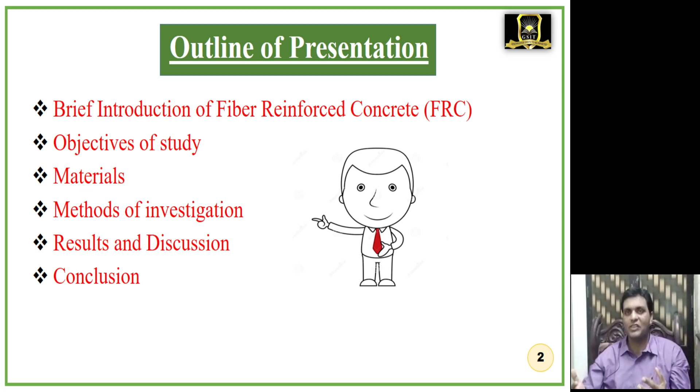So let us start. This is the outline of my presentation. The first one is a brief introduction of FRC, that is fiber reinforced concrete. Next is the objectives of my study. Next is materials, what materials are used in this study. Next is methods of investigation, what methods and tests are conducted in this investigation. Next, result and discussion, a very important one. And finally, conclusion.

Nowadays, there is a growing awareness of the advantages of fiber reinforcement technique of construction all over the world. In recent times, there is growing interest in the use of various types of fibers in structural applications due to their lightweight, low cost and sustainability. The effects of fiber on the behavior of plastic and hardened concrete varies depending on the concrete materials, mix proportion, fiber type, length, and quantity of fibers added into the concrete. So these are the factors that have to be considered.

As we all know, concrete is weak in tension and strong in compression. Even though reinforcement is provided in the tension zone, micro cracks are developed in tension and compression zones. Generally, concrete made from Portland cement is relatively strong in compression but weak in tension and tends to be brittle. The weakness in tension can be overcome by the use of conventional steel bar reinforcement and, to some extent, by mixing a sufficient volume of certain fibers, which helps improve its toughness. Generally, plain concrete gives very low tensile strength, limited ductility, and little resistance to cracking.

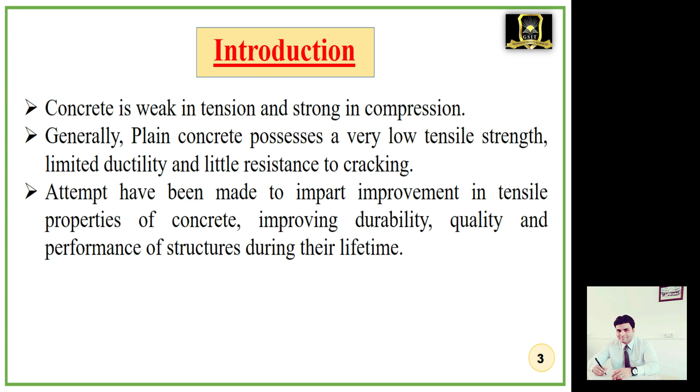So attempts have to be made to improve the tensile properties of concrete, and also to improve the durability, the quality, and the performance of structures during their entire lifetime.

The next one is properties of constituent materials. You can see that flow chart. If you want to prepare fiber reinforced concrete, generally two types of materials are required. One is matrix, second one is fibers. What is matrix? We know that concrete is a composite material. So if you want to prepare concrete, different types of aggregates are required. Matrix is further categorized into cement, aggregate, and admixture.

The first one is cement. All types of cement can be conveniently used in fiber reinforced concrete. Second one is aggregates. The aggregates which are suitable for conventional concrete are also suitable for FRC.

The aggregates are further divided into two types, as we generally know. One is fine aggregate and the second one is coarse aggregate. Fine aggregate is needed for both fiber reinforced concrete (FRC) as well as fiber reinforced mortar preparation. Coarse aggregate, the coarse aggregate which is suitable for normal concrete, is also suitable for FRC concrete.

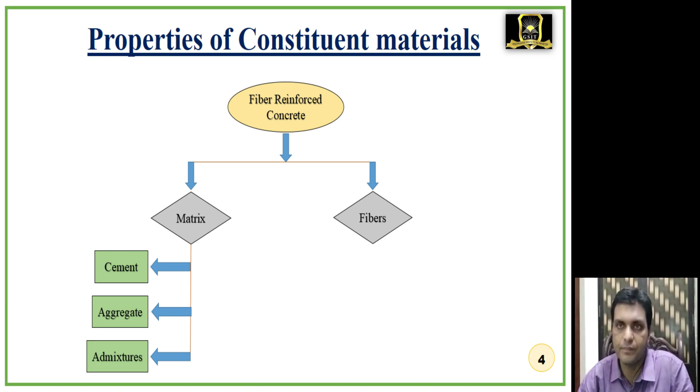Next question: why fiber? It improves properties like ductility, flexural strength, toughness, impact resistance and fatigue strength. There is a little improvement in compressive strength. The amount of improvement depends upon the fiber type, size, strength configuration, and the amount of fibers used in concrete.

Fibers are usually used in concrete to control cracking due to plastic shrinkage and drying shrinkage, that is to eliminate small micro cracks. It also reduces the permeability of concrete and due to that reduces bleeding of water. Bleeding of water is a form of segregation where water comes from the concrete surface due to the lower specific gravity among all the ingredients of concrete. It causes the formation of porous, weak and non-durable concrete.

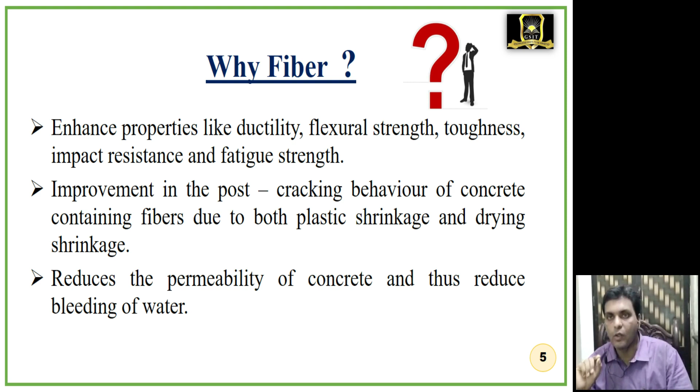Next, history. The concept of using fibers as reinforcement is not new. Fibers have been used as reinforcement since ancient times. In the early age, straw and mortar were used for producing mud bricks, and horsehair was used for reinforcement.

In the early 1900s, asbestos fibers were used in concrete. Later, the use of asbestos in concrete reinforcement was discouraged due to detection of health risks. Active research is still in progress on this important technology.

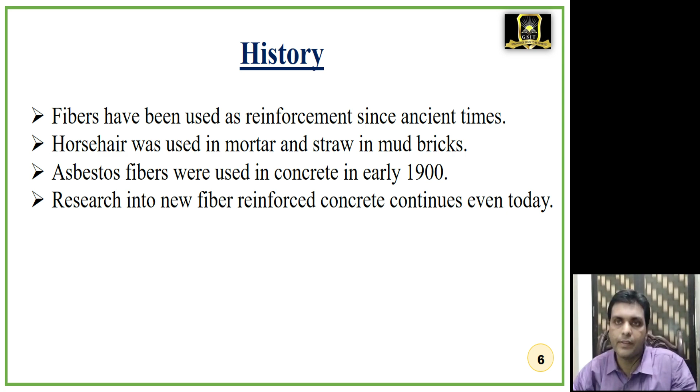Next, FRC, fiber reinforced concrete. Concrete containing hydraulic cement, fine or coarse aggregate, and discontinuous discrete fibers is known as fiber reinforced concrete. FRC is concrete containing fibrous materials which increases its structural integrity. It contains short discrete fibers that are uniformly distributed and randomly orientated.

It enhances flexural and tensile strength of the concrete. It is a composite obtained by adding a single type or blend of fibers to conventional concrete. There are different types of fibers used in industries: steel fibers, glass fibers, synthetic fibers, and natural fibers. Each of these fibers gives varying properties to the concrete.

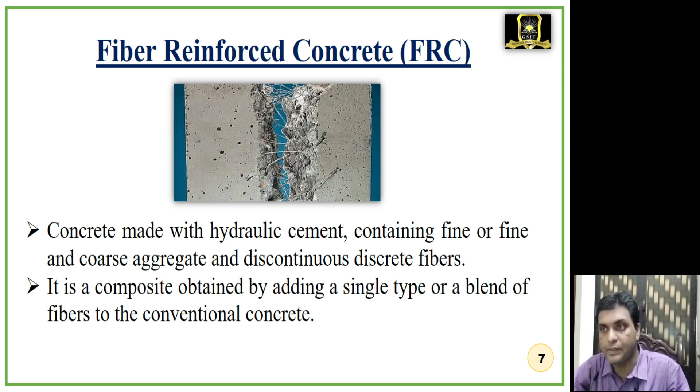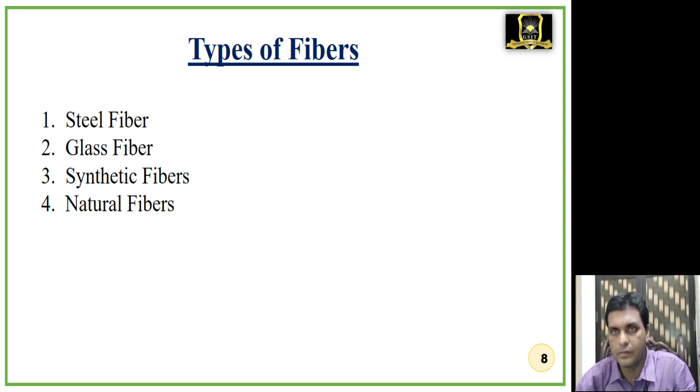Next, types of fibers. Fibers are basically classified as four types: one, steel fiber; two, glass fiber; three, synthetic fibers; and fourth, natural fibers.

Such type of concrete is used for airfield pavements, bridge decks, thin shells and plates, industrial flooring, canal lining, and construction work. Second one is glass fibers.

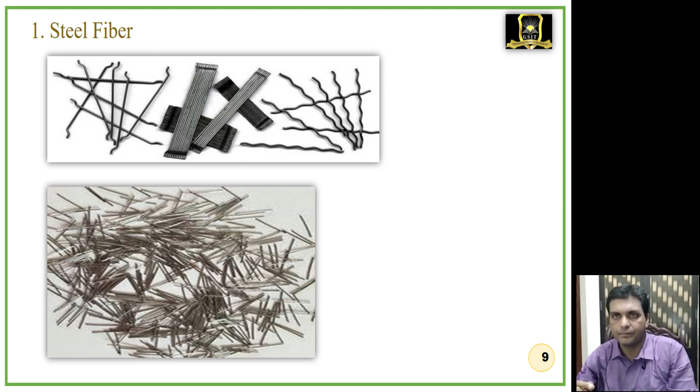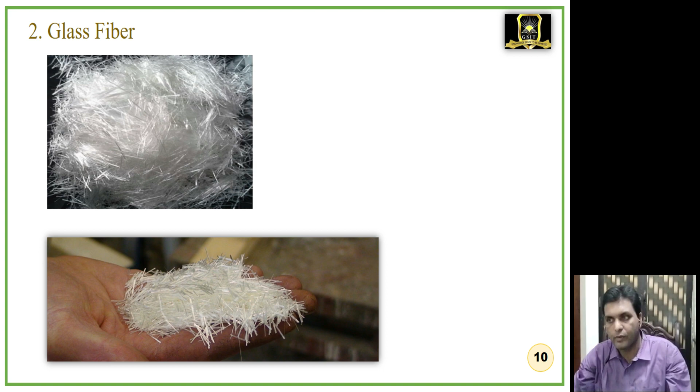Such glass fiber concrete is used for floor formwork, swimming pools, duct and roof, wall paneling, etc.

Third one is synthetic fiber. There are four pictures you can see. First picture, polypropylene fiber. Second one is polyester fiber. Third one is nylon fiber. Fourth one is acrylic fiber. So these are all synthetic fibers.

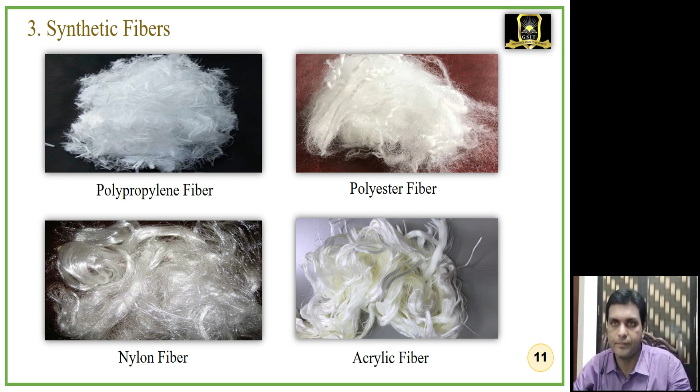Synthetic fibers are an artificial, man-made material that can withstand the long-term alkaline environment of concrete. They are made from synthesized polymers or small molecules obtained from petrochemicals and textile industries. It gives high chemical resistance, high melting point, low modulus of elasticity, and can be used in cladding panels and shotcrete. Fourth, natural fibers.

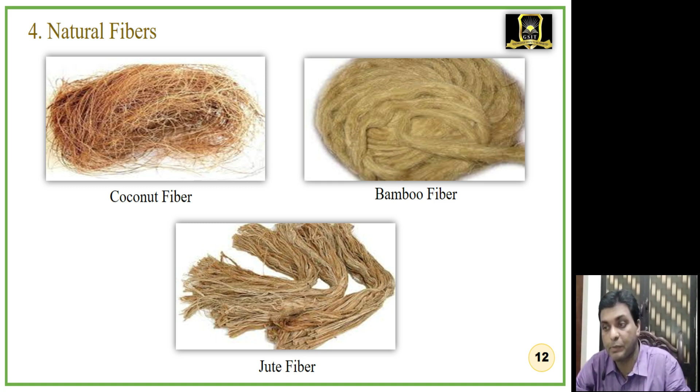You can see in these pictures, these are a few examples of natural fibers: coconut fibers, bamboo fibers, jute fibers. They are obtained at low cost and low level of energy using local manpower and technology. Natural fibers are cheaply available and suitable as an alternative to metallic and synthetic fibers used as building materials. They give low modulus of elasticity and high impact strength. Natural fibers are used in low cost concrete structures, especially in tropical earthquake regions.

Next, the various factors affecting the properties of FRC are: relative fiber matrix stiffness, volume of fibers, aspect ratio of the fibers, orientation of fibers, workability and compaction of concrete, size of coarse aggregate, and mixing. The first one is relative fiber matrix stiffness.

Low modulus fibers such as nylon and polypropylene do not give strength improvement and help in absorption of large energy, therefore increasing toughness and resistance to impact. High modulus fibers such as steel, glass and carbon give impact strength and stiffness to the composite.

Second factor is volume of fibers, which mainly depends upon the quantity of fibers used. Increase in volume of fibers generally increases approximately linearly the tensile strength and toughness of concrete. Use of high percentage of fibers is likely to cause segregation and harshness problems in concrete as well as mortar.

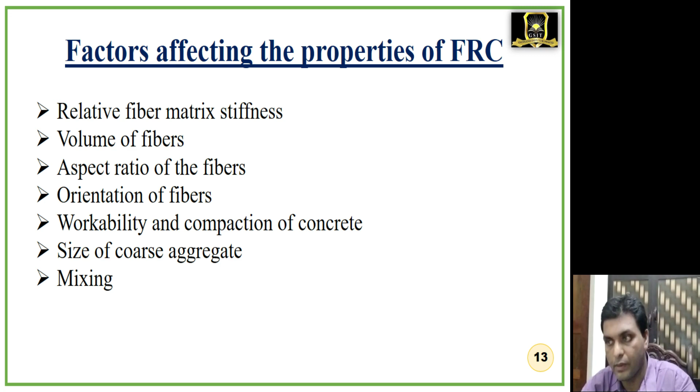Last factor is mixing. Fiber should be mixed in concrete thoroughly to avoid balling of fibers and segregation. Mixing of fibers becomes more difficult when aspect ratio is higher and the volume of fiber is also more.

Next, advantages of FRC. Some advantages of fiber reinforced concrete are: it performs well under heavy service load, meaning the joint edges of FRC members do not swell and chip away easily under heavy service load.

FRC gives more resistance to impact. Depending upon the additional amount of fiber, it gives higher flexural strength. Fibers are made into sheets or irregular shapes. It controls plastic shrinkage cracking and drying shrinkage cracking, and also improves the post-cracking behavior of concrete.

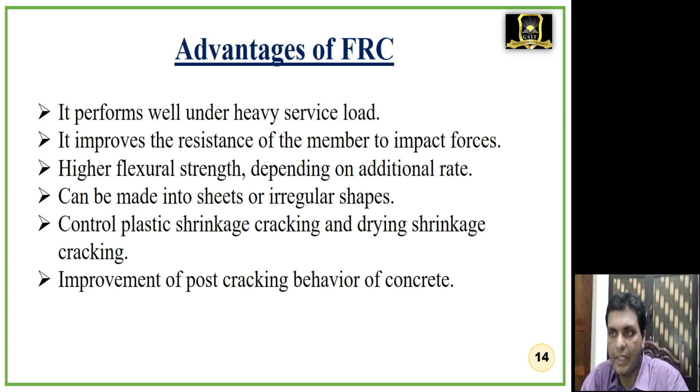Next, disadvantages of FRC. It has a few disadvantages, like reducing the workability of concrete, and high cost of materials in terms of steel fibers. Generally steel fibers are costlier at present, so FRC becomes very expensive compared to RCC in terms of material alone.

The balling effect of fibers makes FRC very undesirable. The main drawback of FRC is its fabrication process.

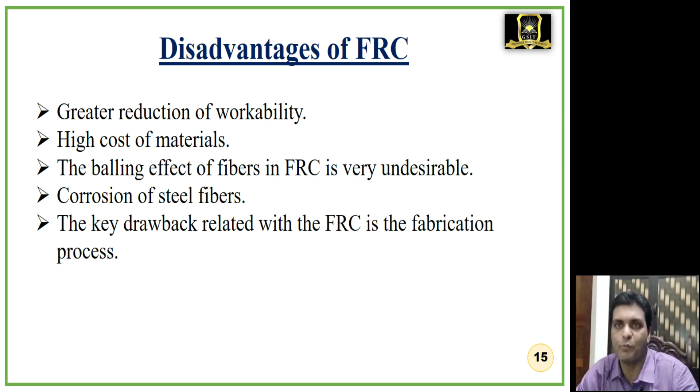Next, applications of FRC. Nowadays many construction projects are using FRC. There are several applications. One is runway, taxiway and airfield pavement. You can see a beautiful runway constructed using FRC concrete. Generally, 150 mm thick crimped FRC slab is used for the asphalt paved aircraft parking areas.

Recently, the Chicago and St. Louis Lambert airports were constructed using a combination of steel fibers and polymesh fibers.

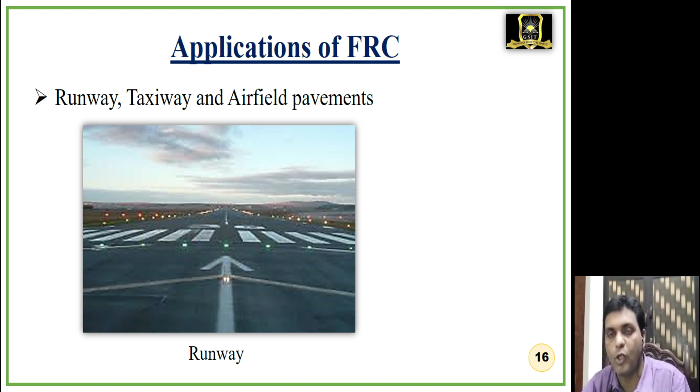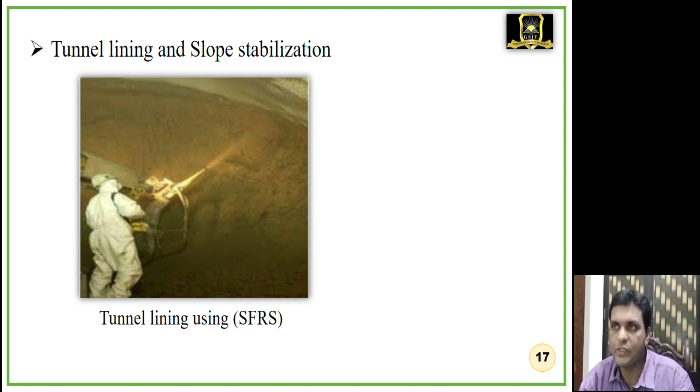Second application is tunnel lining and slope stabilization. You can see in the picture a person doing tunnel lining using SFRS, which is steel fiber reinforced shotcrete. Generally it is used for tunnel lining, especially in underground openings and slope stabilization, eliminating the requirement of mesh reinforcement and scaffolding.

Next is thin shell pipes and manholes. You can see pipes and wall panels in the picture. Generally, fibrous concrete permits the use of thinner flat and curved structural elements.

Steel fiber shotcrete is used in construction of hemispherical domes, and GFRC (glass fiber reinforced concrete) is made using a spray-up process, used in construction of wall panels. Additional steel and glass fibers are used in construction of concrete pipes and manholes, improving strength and reducing thickness.

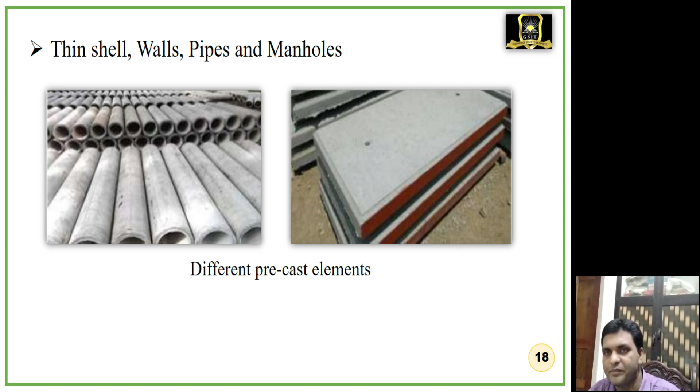The next application is dams and hydraulic structures. You can see a beautiful picture of a marine and hydraulic structure.

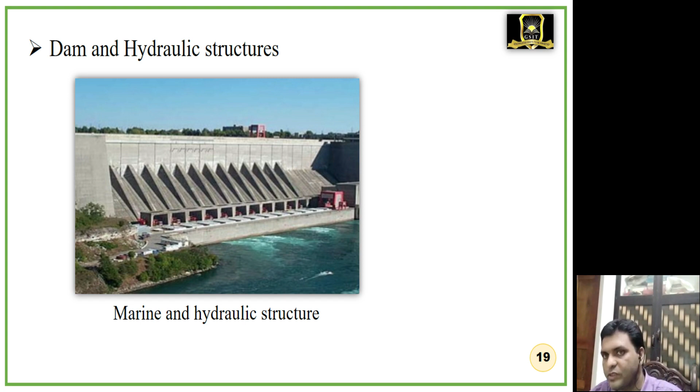Generally, FRC is used for construction as well as repair work of hydraulic structures like dams, wall platforms, lock structures, stormwater structures, and ditches. It provides resistance to cavitation, that is erosion caused by the impact of large water forces.

Other applications include lighting poles, water and oil tanks, concrete repairs, and fabrication of precast products like boats, beams, staircases, etc.

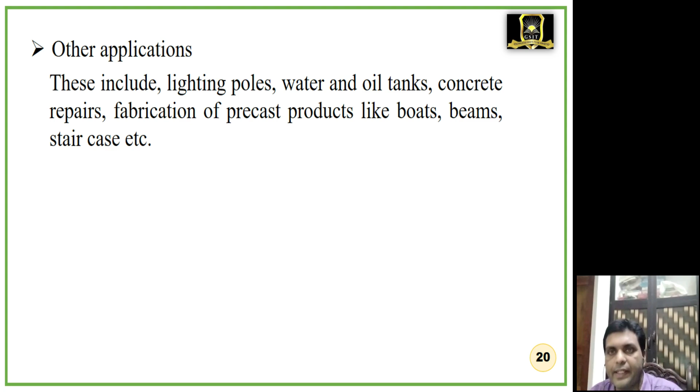Next, some examples in India where FRC concrete is used. This is one beautiful example: recently a road was constructed, a road overlay for a project at Mathura in Uttar Pradesh, where more than 400 tons of steel fibers were used.

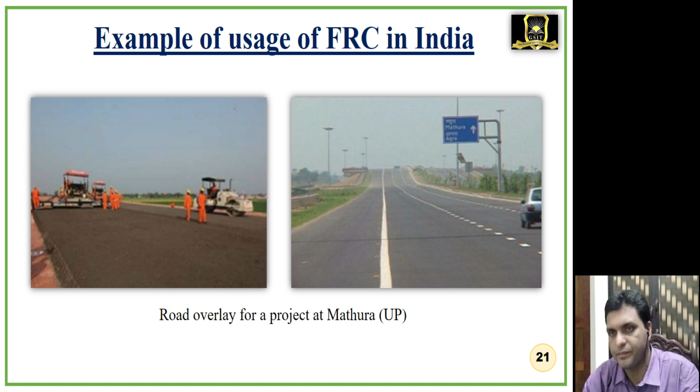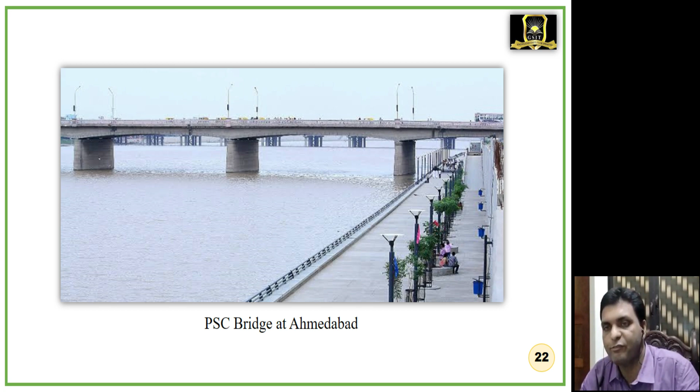You can see in this picture a beautiful bridge constructed at Ahmedabad in Gujarat state. FRC is successfully used at the end and anchorage zones of precast concrete girders for resisting bursting and spalling forces in the bridge.

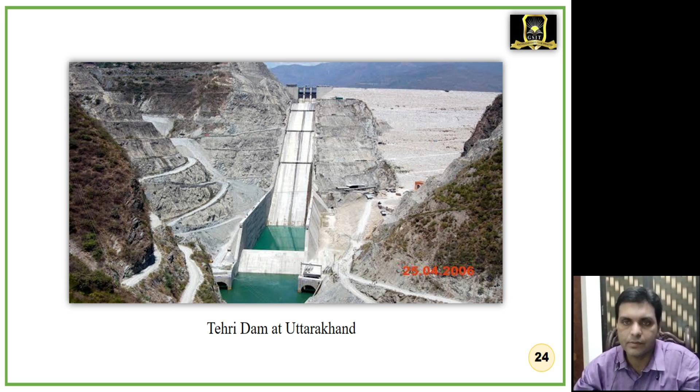Next is Tehri Dam, constructed across the Bhagirathi River in Uttarakhand, a beautiful dam built using FRC concrete. The length of the dam is 575 meters and height is about 260 meters. This dam is used for multiple purposes like irrigation, municipal water supply, and hydroelectric power generation.

Next is the Mumbai to Pune Expressway, as you can see in that picture. It has a 4-lane wide tunnel at 5 locations with a total length of 6,000 meters, constructed by Maharashtra State Road Development Corporation.

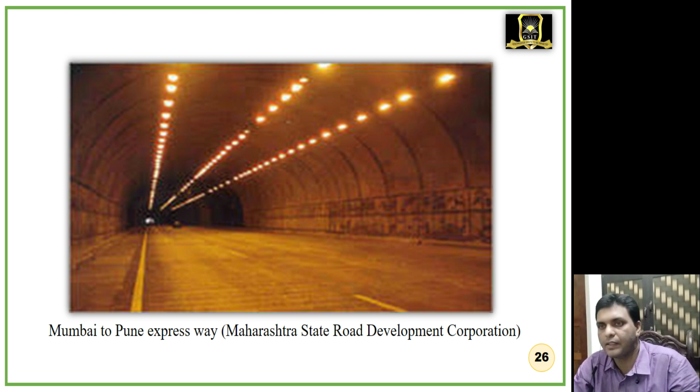This is the experimental investigation we conducted in our GSIT laboratory, on the utilization of polyester fiber for improved properties of concrete.

In this investigation, we determined the split tensile strength and resistance to cracking by determining the flexural strength of plain concrete and polyester fiber reinforced concrete using Recron 3S, a polyester fiber by Reliance. The aim was to increase the tensile strength and flexural strength of concrete, which is generally weak in tension and strong only in compression, and to increase ductility of concrete under tensile stresses.

In this investigation we used OPC 43 grade cement for all experimental work, and all necessary tests on cement and aggregates were conducted. We used various percentages of fiber - 0.2, 0.4, 0.6 by weight of cement - tested for compressive strength, split tensile strength, and flexural strength.

After that, these mixes were compared with the nominal mix with 0% fiber. A comparative analysis was carried out to obtain the percentage increase or decrease in strength due to the addition of fiber for all the above tests.

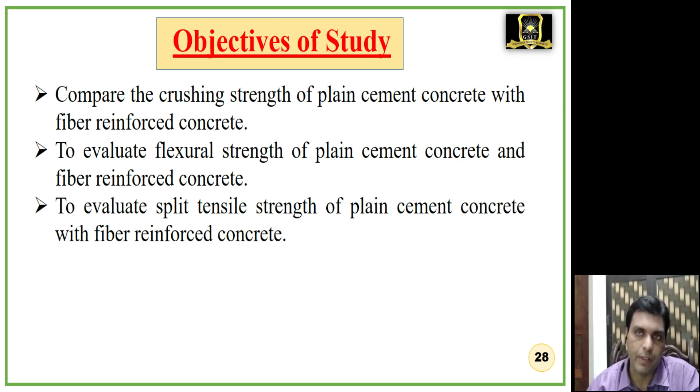Objectives of the study: to compare the crushing strength of plain cement concrete with fiber reinforced concrete; to evaluate flexural strength of plain cement concrete and fiber reinforced concrete; and to evaluate split tensile strength of plain cement concrete with fiber reinforced concrete.

The next topic is materials. First is cement. In our experiment, we used 43 grade ordinary Portland cement, JK brand, conforming to IS 8112:1989, and we tested the cement in our lab.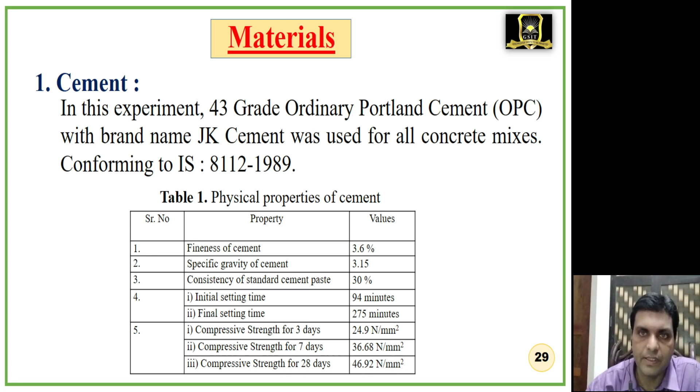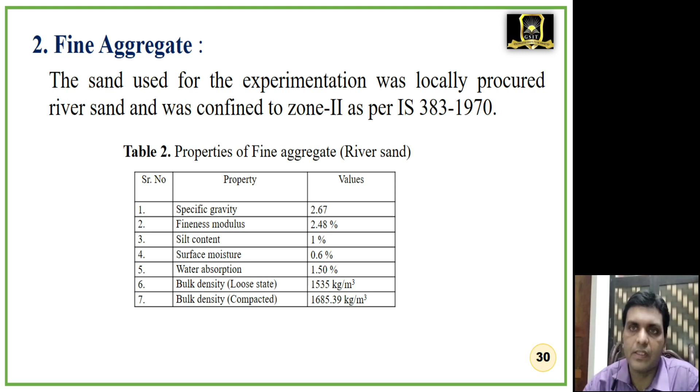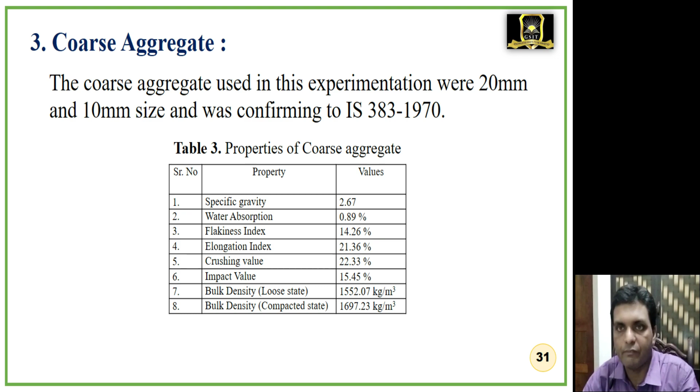Third is coarse aggregate. The coarse aggregates used in this experimentation, 20 mm and 10 mm size, conform to IS 383:1970. Table 3 shows the properties of coarse aggregate. Various tests were conducted for coarse aggregate in our lab, and we found these test results.

The next one is the fourth material, polyester fiber.

We used Recron 3s fiber for this study, which is a 12 mm long triangular monofilament polyester fiber, manufactured by Reliance Technology Center, Mumbai.

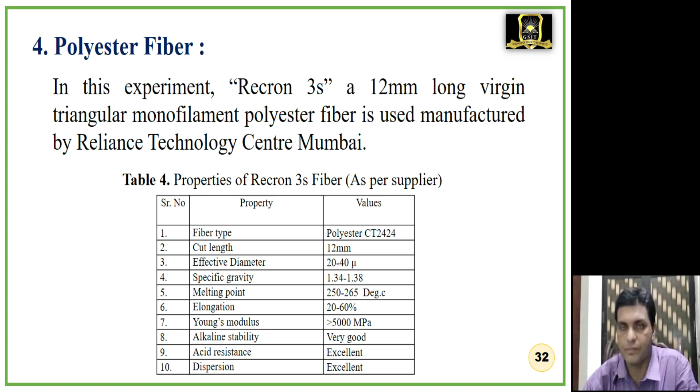Next is water. The water used for this study is clean, free from oil, salts, and acids, generally potable water available in the laboratory.

This water is used to satisfy the requirement as per IS 456-2000.

Mix proportion: M20 grade of concrete with mix proportion 1:1.5:3 and water cement ratio 0.45 was used in this experiment.

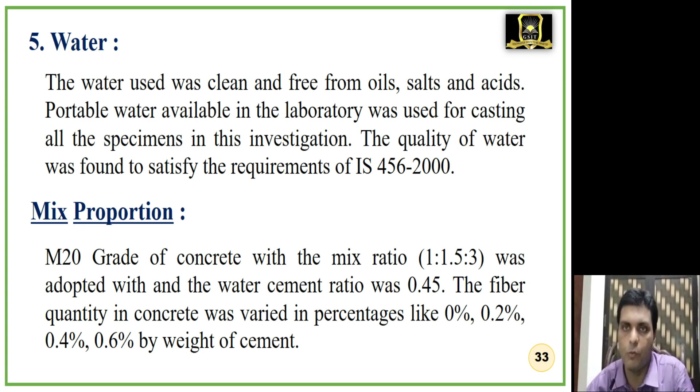The fiber quantity in concrete was varied in percentage like 0%, 0.2%, 0.4%, and 0.6% by weight of cement.

First, specimens of fiber reinforced concrete and conventional concrete were prepared separately. Mixing was done in a laboratory using a pan mixer; aggregates, cement, and fibers were mixed in this revolving pan mixer.

After proper mixing, the required quantity of water was added, and mixing was continued until a uniform mix was obtained.

The thoroughly mixed concrete was filled into the mold in three layers of equal height by the tamping process.

There are three types of specimens used for three different tests. The first is the compressive strength test, for which we use a 15 by 15 by 15 cm cube mold specimen.

For flexural strength, we use a flexural beam of 10 cm by 10 cm by 50 cm specimen size, and for tensile strength we use a cylindrical specimen of 15 cm diameter and 30 cm length.

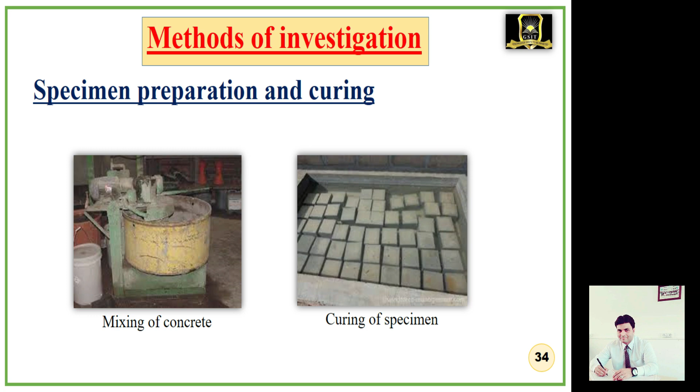After that, the specimens were removed from the mold immediately and submerged in clean, fresh water for curing periods of 7, 14, and 28 days. Next is workability of fresh concrete.

The first workability test is the slump test, conducted as per IS 1199/1959, and slump values with respect to different percentages of Recron fibers were noted down.

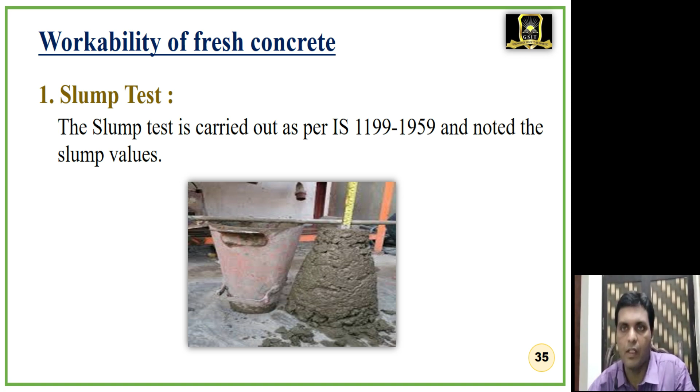Next is the compaction factor test, conducted as per IS 1199/1959.

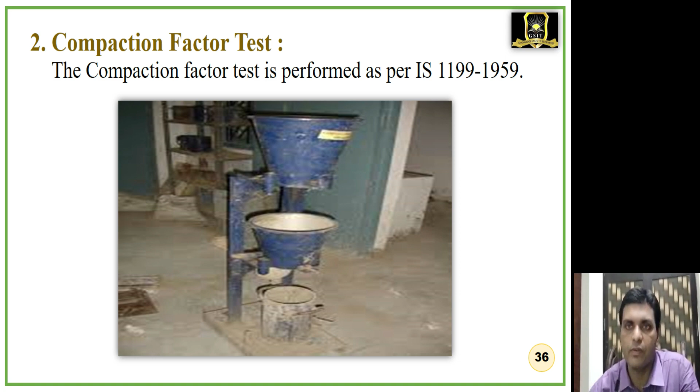Compaction factor values with respect to percentage of Recron fibers were noted down.

The third test is the VB consistometer test, performed as per IS 1199/1959.

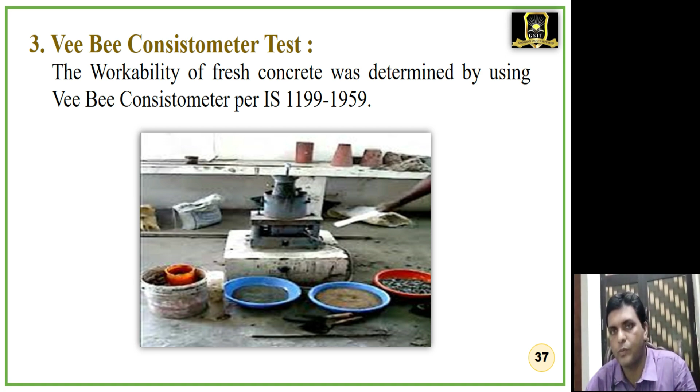The VB consistometer values with respect to different percentages of Recron fibers were noted down.

Next is the strength study on hardened concrete. The first is the compressive strength of concrete test.

In this test, compressive strength specimens of size 150 mm by 150 mm by 150 mm were cast and tested on a compressive testing machine with a capacity of 2000 kilonewton as per IS standard.

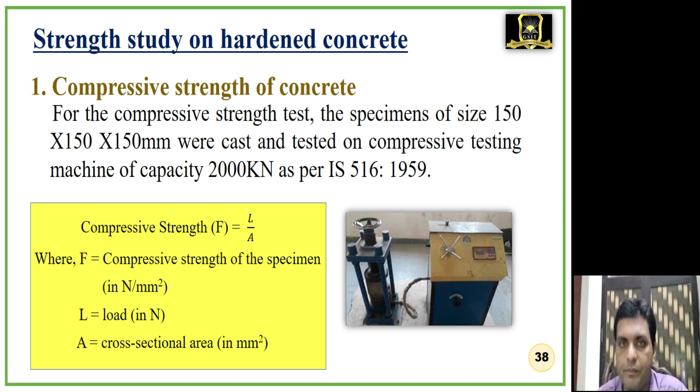Compressive strength F equals L divided by A, where F equals compressive strength of the specimen in Newton per mm square, L equals load in Newton, and A equals cross sectional area in mm square.

The next test is the flexural strength of concrete. Flexural strength beams of size 100 mm by 100 mm by 500 mm were cast and tested under two-point loading conditions with a span of 400 mm.

This was done as per IS 516/1959. Flexural strength of concrete FB equals PL divided by BD square, where FB equals flexural strength of concrete in Newton per mm square.

P equals failure load in Newton, D equals depth of beam, that is 100 mm, L equals effective span of beam, that is 400 mm.

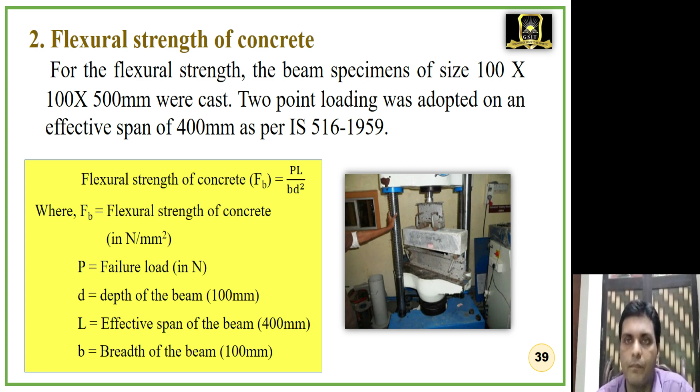The third test is the split tensile strength of concrete. The tensile test specimen is cylindrical, with diameter 150 mm and length 300 mm.

These were cast and tested in a compressive testing machine with a capacity of 2000 kilonewton as per IS 5816:1999.

Split tensile strength of concrete F equals 2P divided by D into L, where F equals tensile strength of concrete in Newton per mm square, P equals load at failure in Newton, D equals diameter of cylindrical specimen, that is 150 mm.

L equals length of the cylindrical specimen, that is 300 mm.

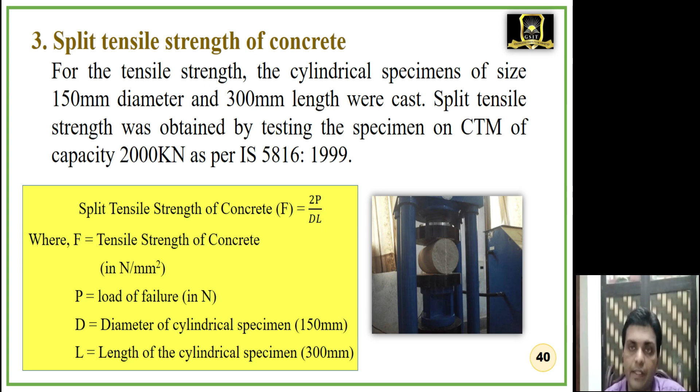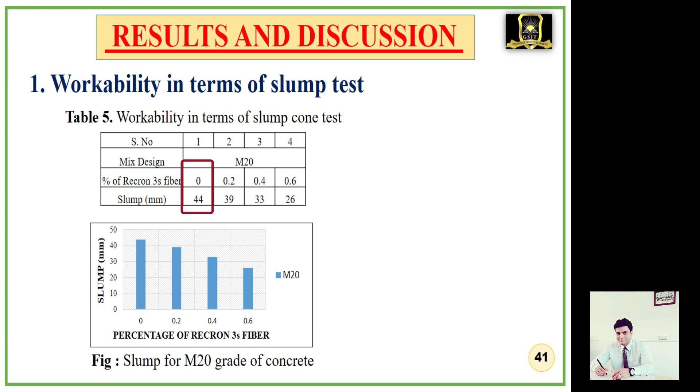The slump study is conducted without adding any admixtures. It can be observed that as the percentage of Recron 3S fiber increases in the mix, the slump value decreases. Hence it can be concluded that with the increase in fiber content, workability decreases.

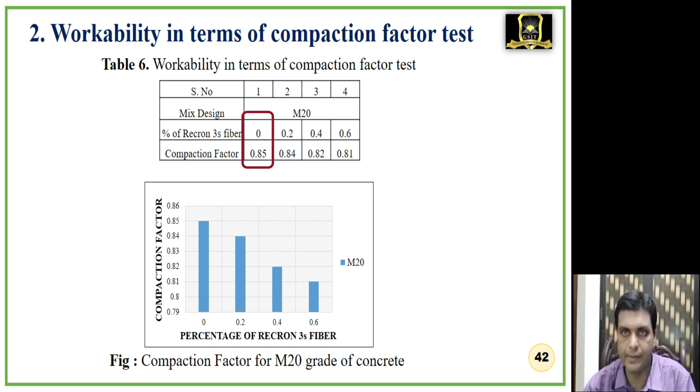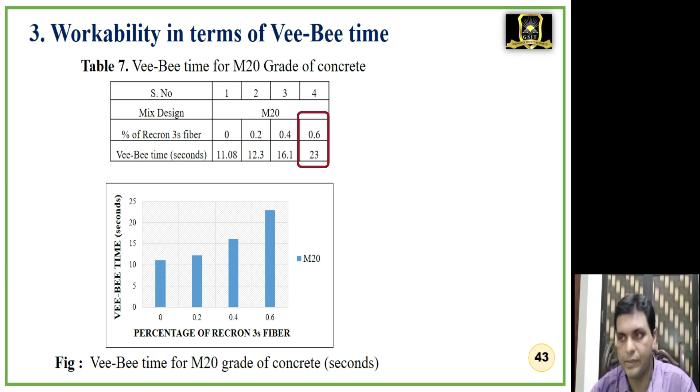Hence it is concluded that the workability of concrete measured from the VB consistometer shows that as the percentage of Recron 3S fiber increases, VB time increases, so the workability decreases.

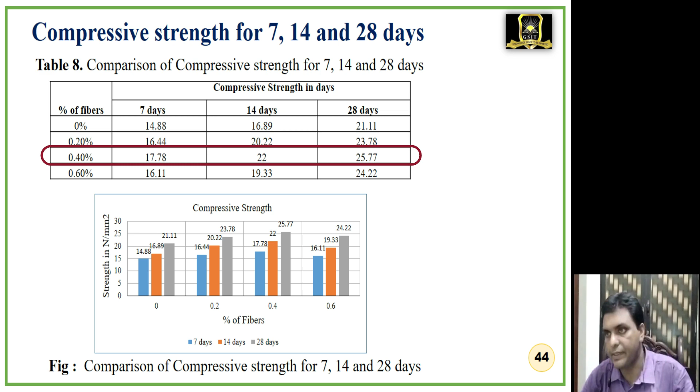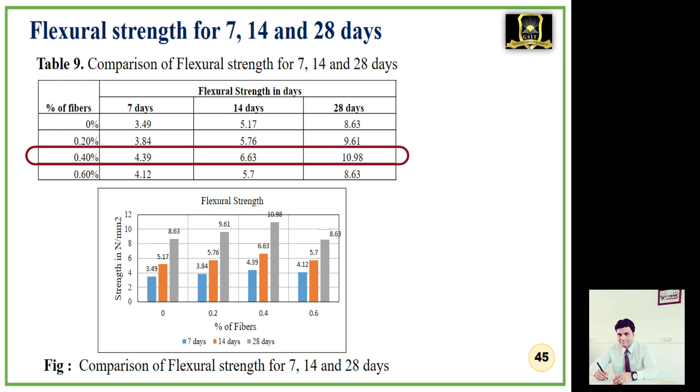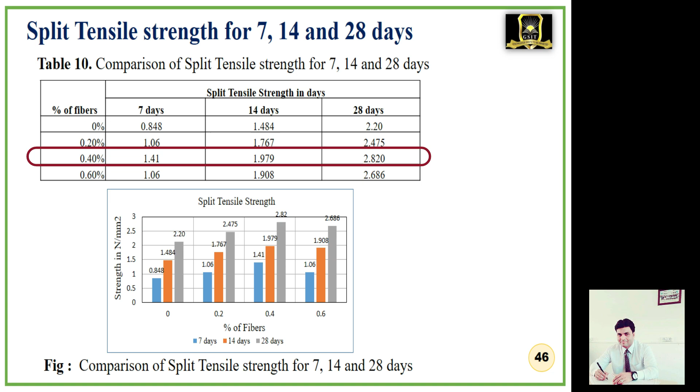Conclusion. Results were analyzed to derive useful conclusions regarding the strength characteristics of fiber reinforced concrete, for which M20 concrete has been used as a reference mix. The following conclusions were drawn from the study on strength characteristics of fiber reinforced concrete properties.

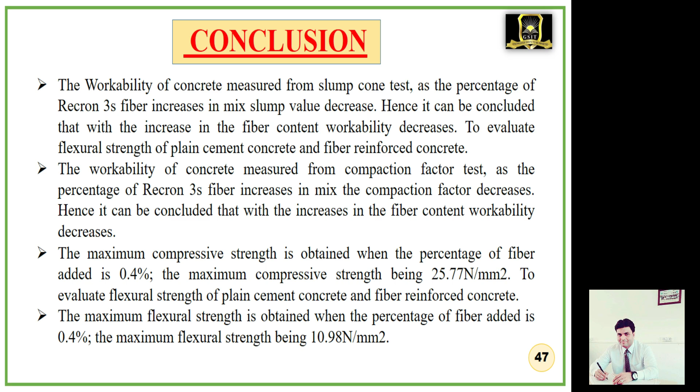The workability of concrete measured from the slump cone test shows that as the percentage of Recron 3S fiber increases in the mix, the slump value decreases. Hence, it can be concluded that with increase in fiber content, workability decreases.

To evaluate the flexural strength of plain cement concrete and fiber reinforced concrete: the workability measured from the compaction factor test shows that as the percentage of Recron 3S fiber increases in the mix, the compaction factor decreases. Hence, it can be concluded that with increase in fiber content, workability decreases.

The maximum compressive strength is obtained when the percentage of fiber added is 0.4%, the maximum compressive strength being 25.77 Newton per mm square.

To evaluate flexural strength of plain cement concrete and fiber reinforced concrete: the maximum flexural strength is obtained when the percentage of fiber added is 0.4%, the maximum flexural strength being 10.98 Newton per mm square.

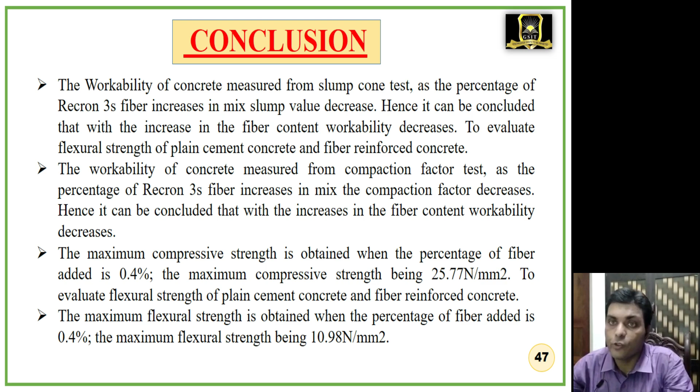The maximum split tensile strength is obtained when the percentage of fiber added is 0.4%, the maximum split tensile strength being 2.82 Newton per mm square.

To evaluate flexural strength of plain cement concrete and fiber reinforced concrete: it is found that the compressive strength, flexural strength and split tensile strength are highest at 0.4% addition of fibers, and reduce when the percentage of fiber added exceeds 0.4%.

To evaluate split tensile strength of plain cement concrete with fiber reinforced concrete: at 0.4% addition of fibers, the compressive strength is found to be increased by 22.07%, since the 28 days split tensile strength is found to be increased by 33.02%. These fibers can be used as a secondary replacement with steel.

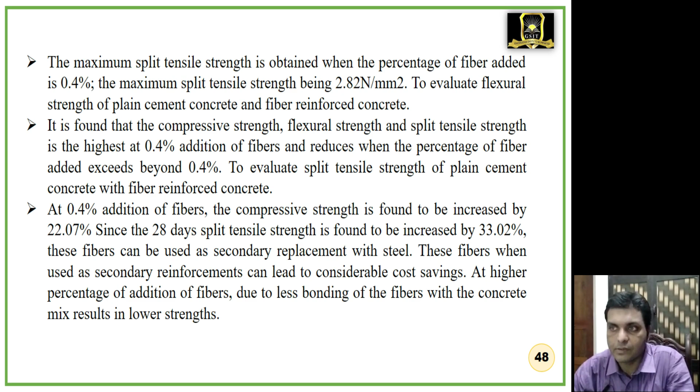These fibers, when used as secondary reinforcement, can lead to considerable cost savings. At higher percentages of addition of fibers, due to less bonding of the fibers with the concrete mix, this results in lower strengths.